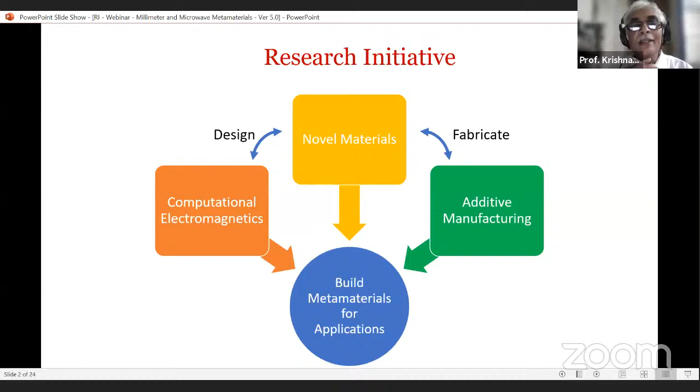So when we look at these three coming together, there are two ways by which we can look at it. One is there is this design aspect, which involves some knowledge of novel materials and a good grasp of computational electromagnetics. And then there is this other aspect, knowledge of novel materials and knowledge of additive manufacturing, which helps to fabricate the design that has come up through these computational aspects, and then putting them together to build metamaterials for application. So this is the kind of approach that we would like to take. And the kind of scope that we are envisaging in this research program involving metamaterials is to have these metamaterials for different kinds of applications.

So we have grouped them in this manner. We would like to have collimators, lenses, and reflectors, which are coming under this beam shaping feature. We would like to have polarizers, which can be used as discriminators and rotators. We would like to develop absorbers, which can help us in EMI shielding and energy harvesting as well.

And we would like to develop some sensors involving building of antennas and bolometers, all of which are essentially based on metamaterials. So this is the scope which we are thinking of achieving in the next few years.

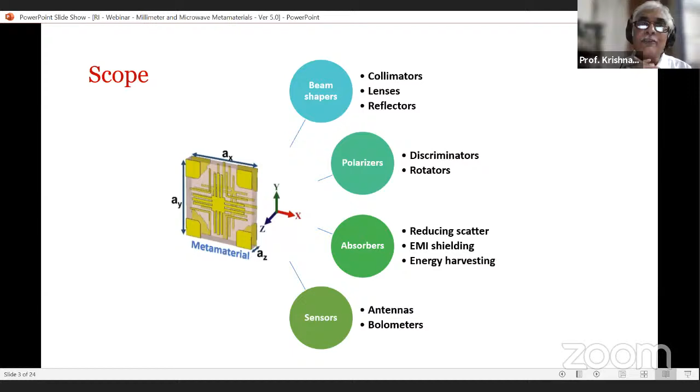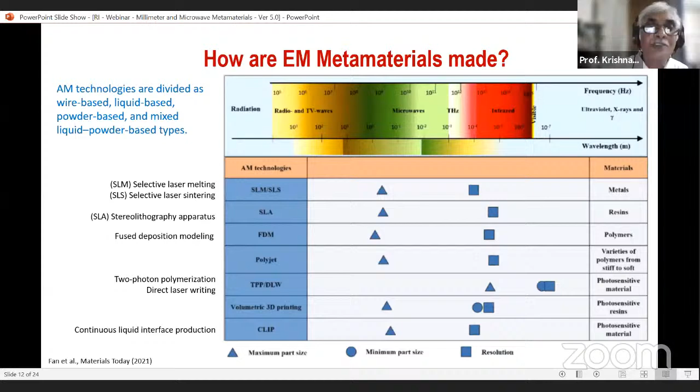Now, additive manufacturing has several advantages. Why it has become very attractive is that it can realize complex 3D geometries. That's the most important aspect of it. And we can do prototyping very quickly. That is, I can realize a real structure very quickly using additive manufacturing, coming into my hands to perform some experiments. So the turnaround time from a design to a structure is very small. It can be automated, it can be customized, and we can alter the design in real time as the printing takes place. And all this can be achieved at reduced costs. So these are the advantages associated with additive manufacturing, and some examples are indicated to give you some idea of what has been done. It's left to our imagination now to realize far more complex structures.

Now, that's the second act. We started discussing the design aspect and then the additive manufacturing aspect of how to fabricate it. And then we come to the role of materials. How are these materials going to play a role in this exercise? We realized that there are certain things that we would like to control through the choice of materials. By materials, I mean the real materials, not the metamaterials. These real materials are basically some metals, some dielectrics, and some combinations of these. So we need to make sure that we get the right material. So what are we trying to do?

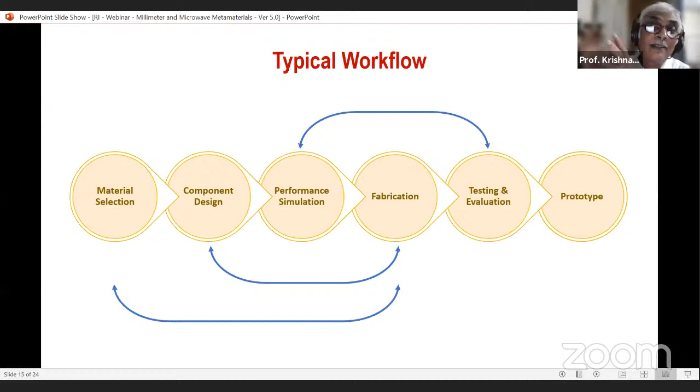A typical workflow would look like this. Once we choose a material, we would like to go for a design, have a performance simulation, go for fabrication, and go for testing and evaluation. And once that is through, we end up having a prototype. But as I mentioned earlier, there are iterative processes. So you see the blue arrows indicating how we need to get back between any two of these. You will see the testing and evaluation is related to performance and simulation. You see the component design related to fabrication. The fabrication also has to be related to material selection. We have to choose all these things carefully such that we get the right material with the right performance characteristics.

People have been working not just in millimeter or microwaves. There has been a huge quantum of work going on in optics. So across the entire electromagnetic spectrum, a lot of development has taken place. So where we are now is that we have some idea about this. We just have to go ahead and start making specific systems or devices for various applications. And that is how we are also pitching it. We would like to make use of the existing resources and knowledge base that are available with us, and we would like to move on with these applications.

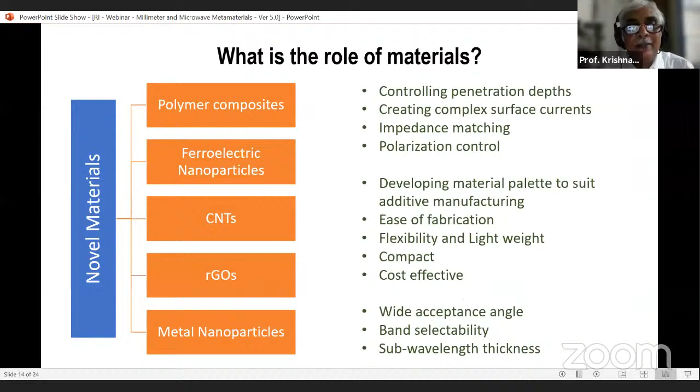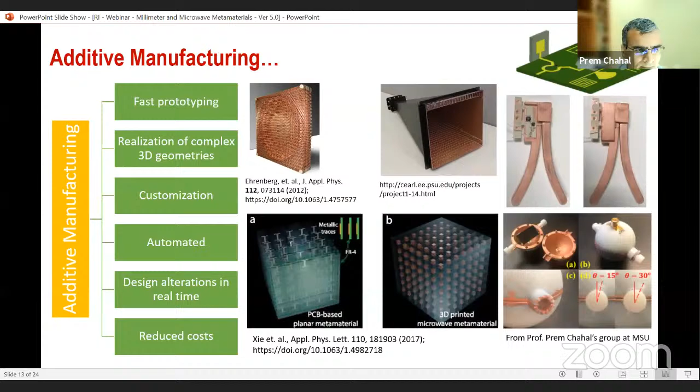So there is another question on complex geometry, and how AM can help. But let me ask CVK to put in the slide on inverse design, and I think that is a good build up to this question. So this question is, what exactly is complex geometry, and why is conventional manufacturing difficult? So I think all of this can be viewed from an inverse design perspective.

And so, for instance, the fundamental of the inverse design perspective is that you want the figure in the extreme right as your output. So the question that you're asking is, given this output, how do I design the layout? And it's not a two-dimensional layout, it's a three-dimensional layout that would give me that particular output. That is really what you're asking.

So if you think of three-dimensional design, that is much better done in terms of understanding what the layout is and essentially realizing it using additive manufacturing. Prem, correct me if I'm wrong. Right? I think that essentially opens up a new avenue for research in some sense. Okay.

Yeah, so this is an interesting question. For machine learning models to optimize parameters of systems requires a lot of data. Are these data sources only simulation results? Anybody want to take a stab at that? That's a very good question. Can you repeat that, Shankar?

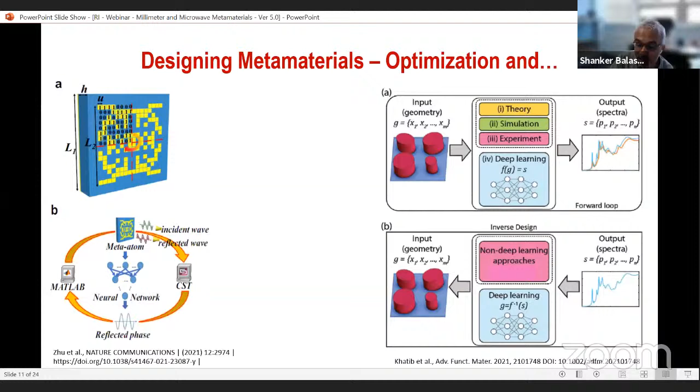So this is a little more back to what you were talking about earlier. How do EBGs, electromagnetic bandgap structures, relate to metamaterials? I think you had a slide. Yeah, I'll just go back to that. There is also a question regarding the difference between metamaterial absorber and photonic crystal, or PBG or EBG. You could answer both.

For photonic band structures or photonic crystals, they have periodicity, and the structure is a slightly huge structure. The individual materials are arranged with a spacing of the order of lambda. But in the case of the metamaterial, the size of the meta-atom is subwavelength. So this is the main difference between the metamaterial and the photonic crystal or EBG bandgap structures.

When it comes to performance, both will have similar performances. What metamaterials do can also be realized by photonic crystals or photonic band gap structures. Another similarity is both have a very high anisotropic nature, and their band structures define the way the electromagnetic radiation flows through. So these are the differences and similarities between EBG structures and metamaterials.

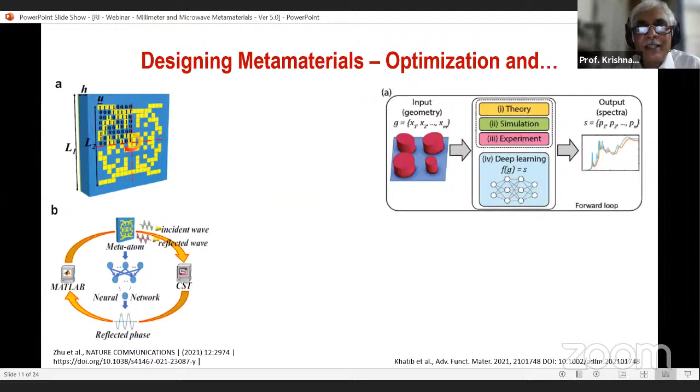So there are some others who are asking how local parameters... This question is, how can we control the value of parameters by knowing the parameter value? That seems very cyclic. But if you know the distribution of epsilon and mu, changes in the distribution of epsilon and mu locally will affect the response far away. I think that's what it means. So maybe the last block here, effective medium approach, is typically the way one proceeds to get the effective parameters given the actual material parameters.

Suppose I have copper material in the form of rods arranged in a particular pattern spatially. And I would like to know the effective value of epsilon and mu because of the spatial arrangement of copper rods. This can be arrived at using the effective medium approach, where the local properties, by local we mean over the scale of the wavelength we are interested in, are averaged out, contributed by the currents generated in the copper rods when excited by the incident wave. So this is typically the effective medium approach: how to get effective parameters of a metamaterial given the building blocks, the copper or anything that we know.

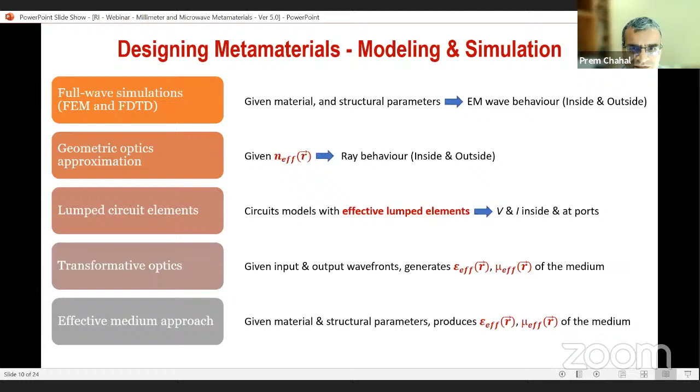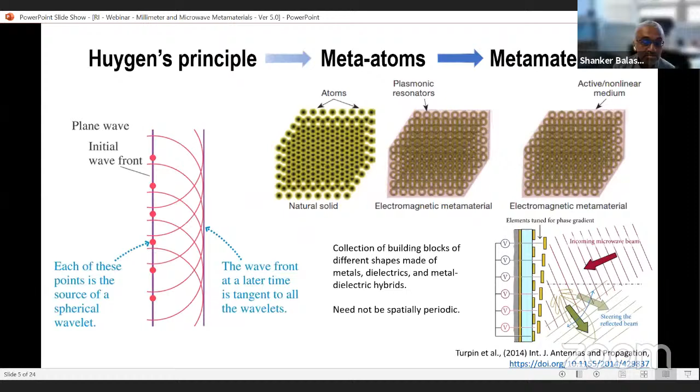Sorry. I think if you look at some of the questions, there is a lot of confusion between metamaterials and real materials. If you go back to the slide that shows it's a bunch of unit cells, and each unit cell is a geometry. This one, three-dimensional, yeah. If you look at the center figure, you see a bunch of rings, right? That's a geometry. But when we say metamaterial, it's the effect of all those things put together when the wave goes through. So we are treating it as an effective medium, but it's not the conventional thinking of material, and there's a lot of confusion from that aspect, based on some of the questions I'm reading.

So what I want people to take away is that as you zoom into it, you're looking at it at optical regimes, at very, very high frequency. So you can tell whether this is a ring or a small rod. But suppose the wavelength were much, much larger than the ring. You would not be able to distinguish the ring at all. Imagine your wavelength is a meter, but the size of the ring is a millimeter. You can't distinguish.

So at that point, what the wave sees is a material that it's passing through. The question we're trying to figure out is what is the property at that scale? What properties at that scale can be designed using a combination of what, at higher frequencies, is a ring or a rod, arranged in a certain manner, such that you would get an effective epsilon or an effective material property? And to answer the last, I think this is the last.

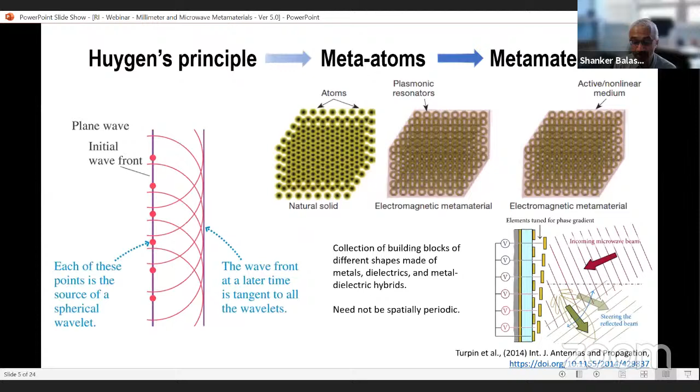This is one of the last questions. If I can add to that, Shanker, the easiest way to think is your screen, right? Like you're looking at the screen. We are not paying attention to individual pixels. We are paying attention to the whole screen. And that's right. That's a very good example. That's a phenomenally good example, right? So you at this point are not focused on any given pixel, right? You see the picture overall, unless the picture quality is so poor the pixels are huge. Yes, that's correct.

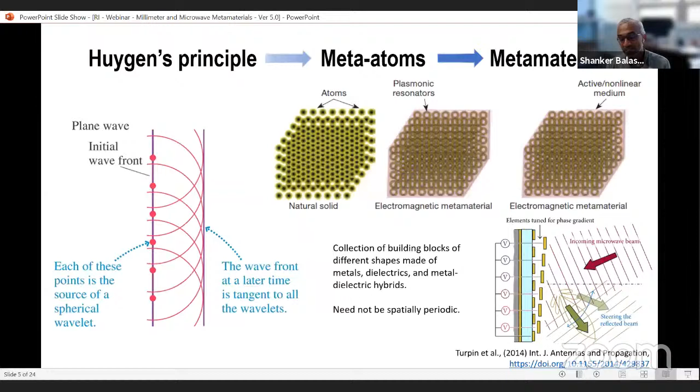Okay, can you guys look at it and see if I'm missing anything from a big picture perspective? So our metamaterials model, considering they're isotropic, they're not. Essentially, you take details at, say, a unit cell scale, and then extract an effective property. And because you're extracting an effective property, they'll look isotropic, right? For a certain frequency regime. As you go higher and higher in frequency, that assumption, of course, will break down. I just put up a slide which says this. The slab will have very anisotropic material properties. On the right, I have indicated.

Right. And I think there's one interesting, nice question related to absorbers. The question is, when you have energy absorbed, where does it go? And I think the brief answer is that when you absorb, let's say, RF power, it's absorbed, but then it's converted into heat as an example. So now you're radiating or transporting the heat energy. So it is going somewhere. It doesn't just disappear. You're converting from one to the other, and the structures are helping you do that easier.

And if we don't want to let it go as heat, we can have the energy stored, and then energy harvesting can be realized. That's correct. And bolometers are an example. They use that change, or you can heat up water, for example. So now you store that energy as heat in water or something. Right.